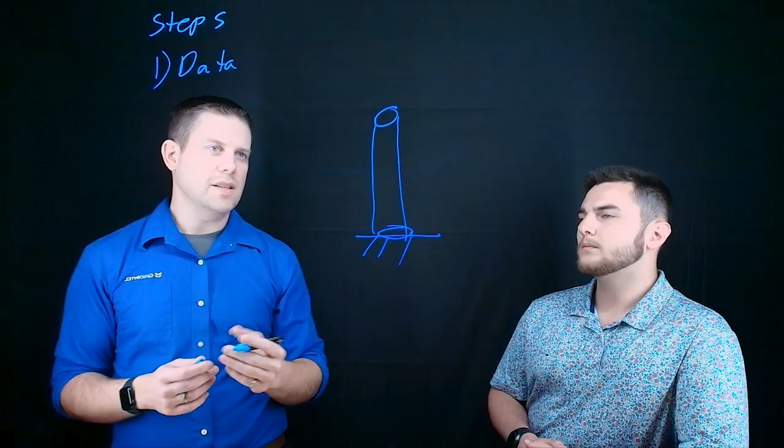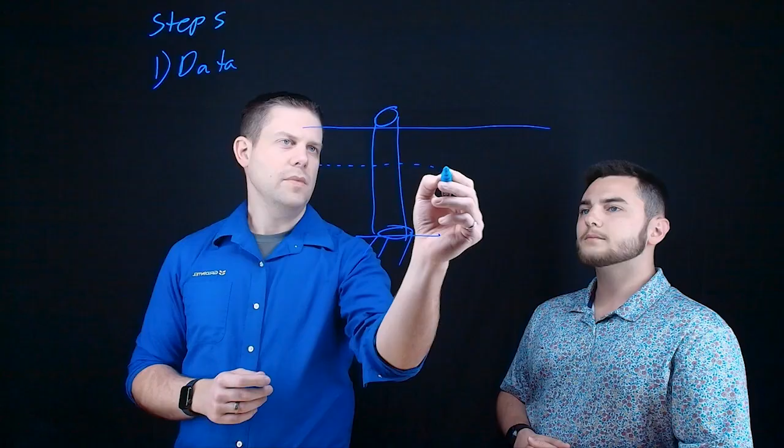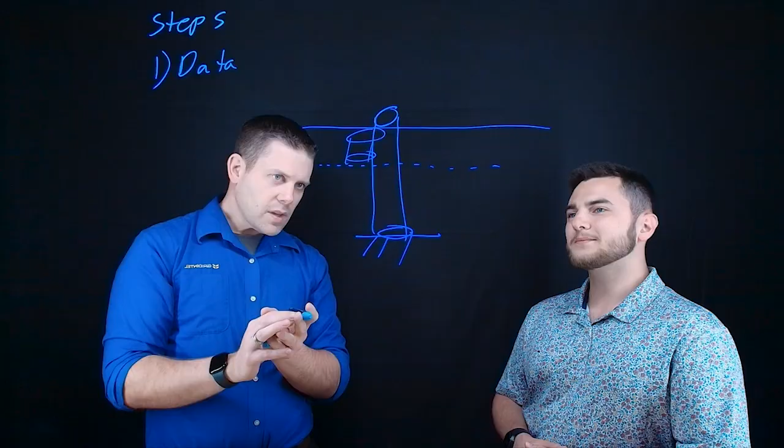You're actually going out, doing your survey, collecting the data, and you're getting these heights. You are getting the conductor heights. So this may actually be your energized line, right? As well as you may have some telecom in here, right? Yes. And then you may have a pole top transformer, right? Never mind this obvious clearance violation there. But the idea being that we have all these forces, and you want to, like I mentioned earlier, determine if it's going to snap. And with PowerView now, being that it's a GIS project management solution, you're doing the data collection directly in the tool. So number one, check, directly in PowerView.

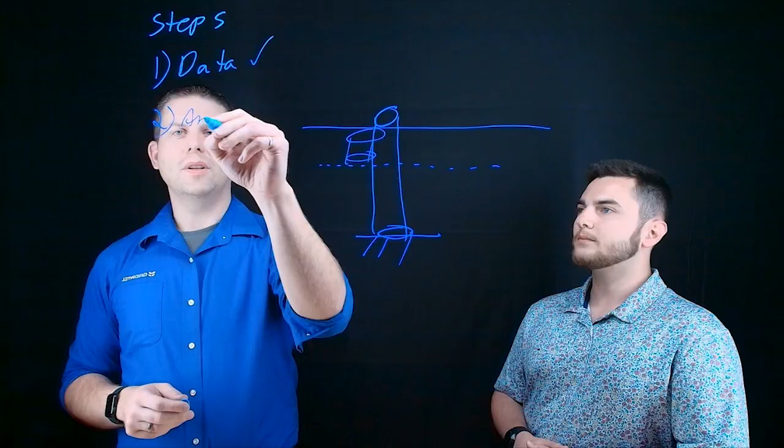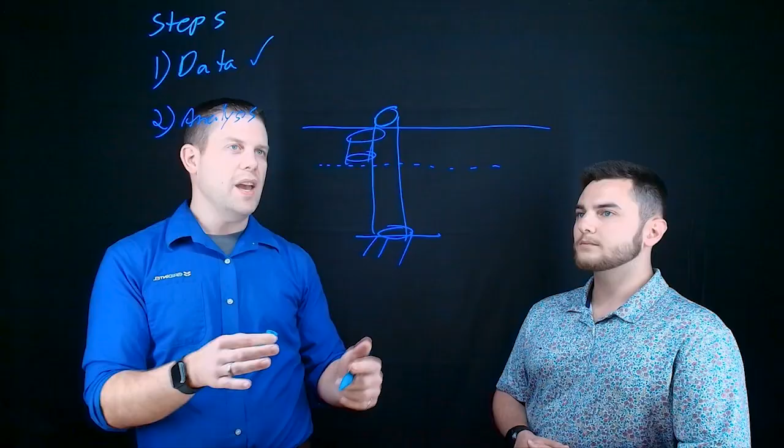Number two is then the actual analysis of whether or not this pole is overloaded. And directly in PowerView, once you do this data collection, we have the ability now to analyze all of these forces, simulate these different load cases from wind, and imagine we're looking down from the top, right? So we can have our little polar coordinate, pole in the middle here. This is north or 0 degrees.

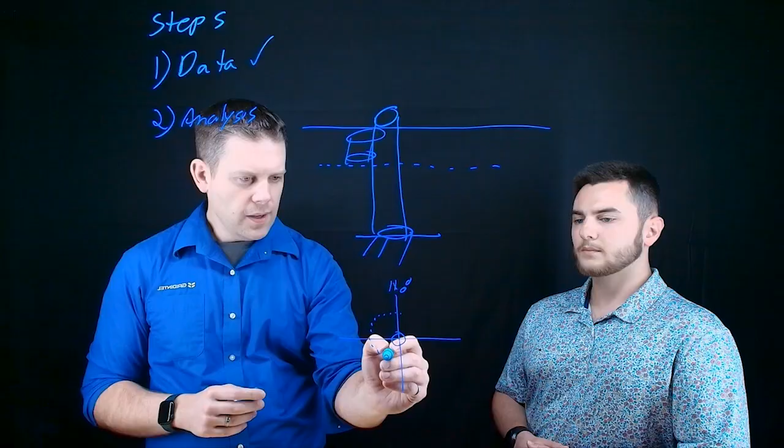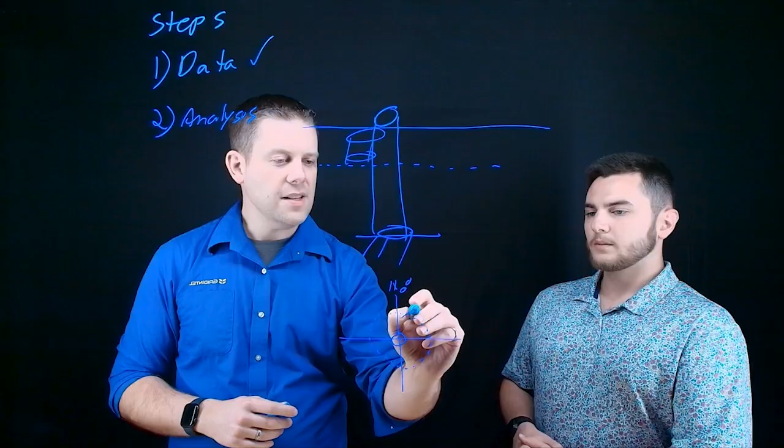And we're able to see and model that if the capacity of the pole represents this dotted line here, whenever we go in and model this, the forces at the bottom are going to exceed the capacity of the pole. Right. So we can model that and know exactly what angle and exactly what magnitude. Right. So that tells us what's wrong with the pole directly in PowerView.

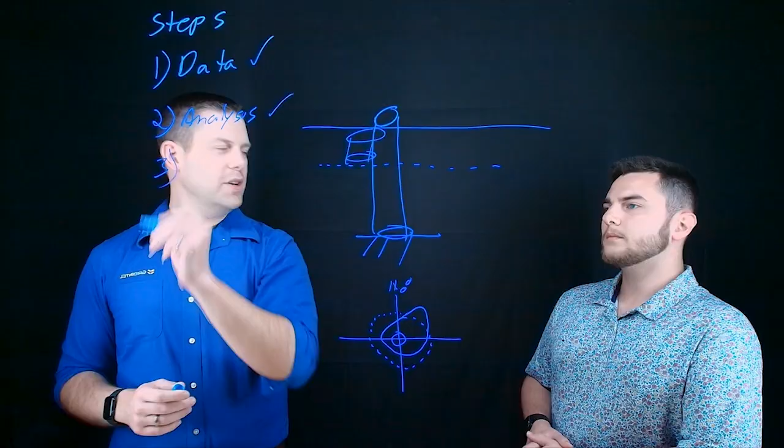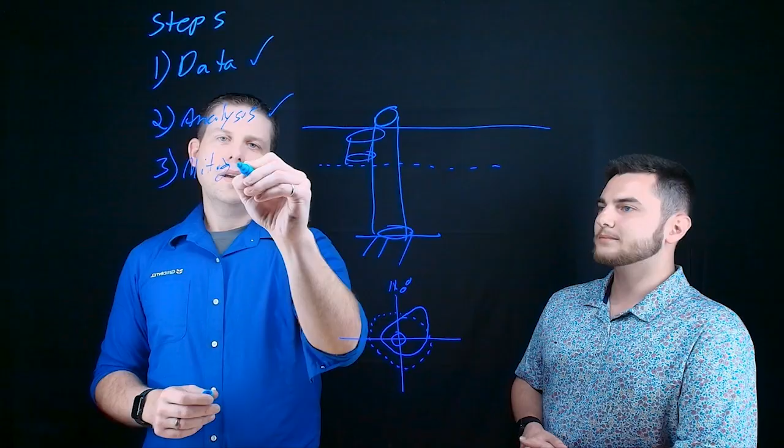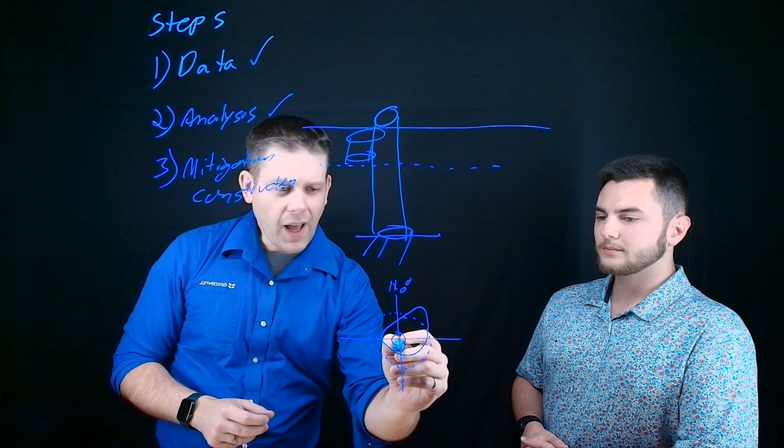And you know what the third one is? Putting it all together. Putting it all together, coming up with the plan for the mitigation. So this is the actual mitigation as well as managing the construction. So if you were to come in here and say, all right, well, we need to upgrade the pole. We need to replace the pole. We need to simply install a guy on this side to bring those forces back to the other side, to get it back to equilibrium. And now all of that is possible to be managed in PowerView.